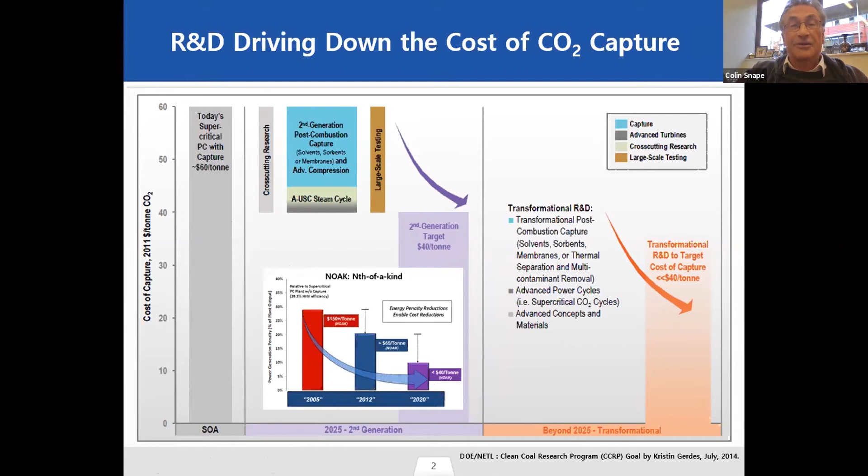The focus is going to be very much on silica polyethyleneimine as a strongly basic system and, as a weaker CO2 adsorbing system, activated carbons. The reason is, at the moment, these are the ones which are the most economically feasible. But really what I'm going to focus on is all the issues that you need to consider on the journey for scale up in terms of stability, and moisture co-adsorption, which I'll bang on about quite a bit as an under-investigated factor.

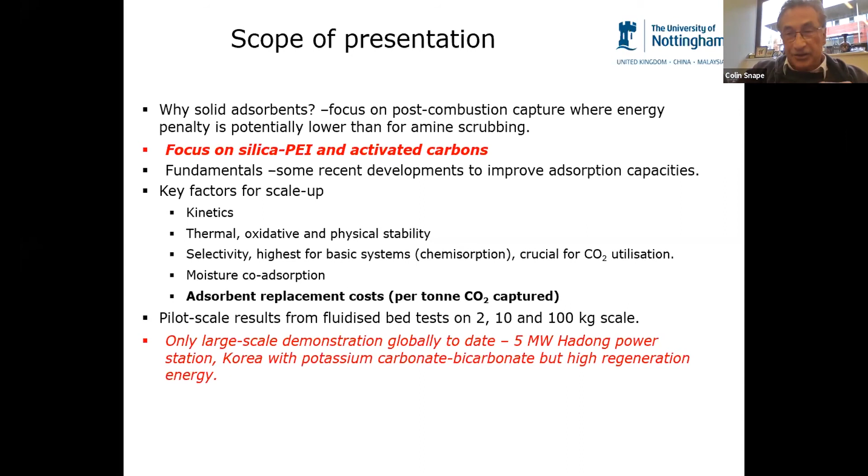And I think as well with amines, what is critical here is the cost of replacing your solid adsorbent per ton of CO2 captured. So I'm going to take you through the journey we've been on, scaling up from 2, 10 to 100 kilogram scale. And as already mentioned, a lot of this has been done in conjunction with the Korea Institute of Energy Research, who built and designed the plant at Hadong Power Station.

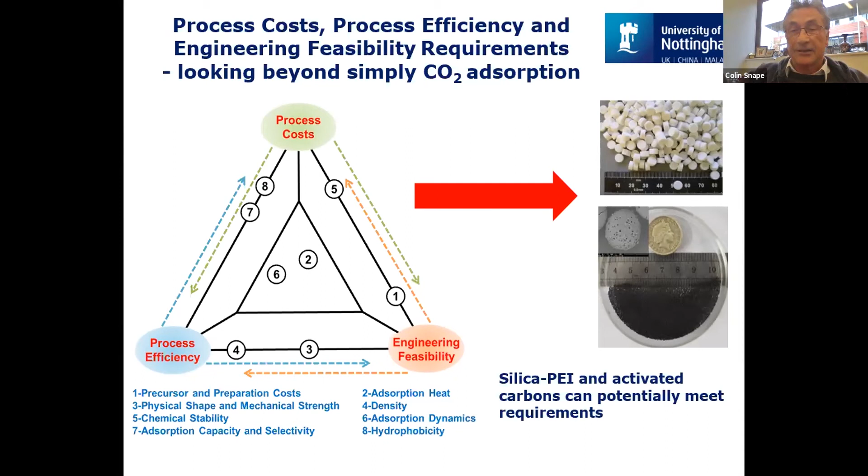So clearly, on the journey from getting published in the highest impact journal possible for the new material you've just discovered, which displays a high adsorption capacity for CO2, I've just listed the obvious factors that might derail you on the journey in terms of scale up as you move to pilot and demonstration plant, particularly physical properties, stability, moisture co-adsorption. And as I said, I'm going to focus on the work we've done on silica-PEI and activated carbons, really to take you through the journey so you can see how some of these factors play out.

But before I do that, what is very important in everything I'm going to say is the regeneration energy. And in the interest of time, I'll just present this in a qualitative sense, that the three principal terms you've got are latent heat of CO2 adsorption, you obviously need to overcome for desorption. There's a sensible heat for heating everything up to your regeneration temperature. And the thing that nobody bothers to investigate, which I'll show is crucially important, is latent heat for steam, for any moisture that's co-adsorbed. So clearly, we want things with low sensible heat, and this is where adsorbents score heavily over amine solutions.

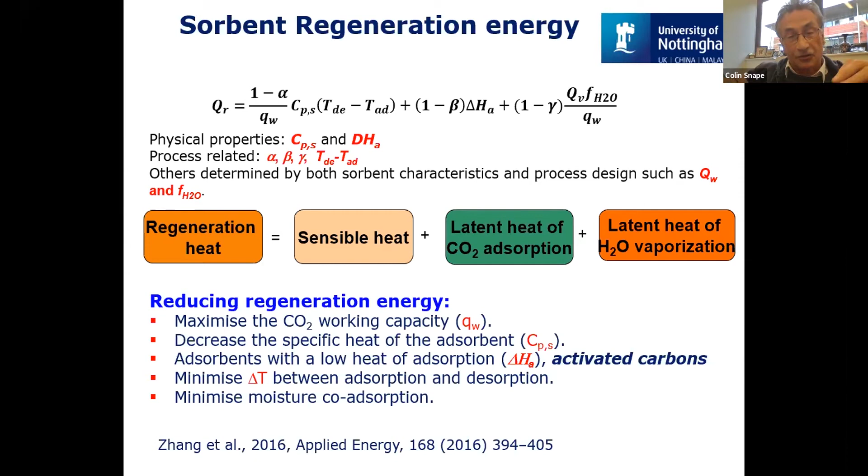Ideally, we want to minimize the heat of adsorption, so the activated carbons have much lower enthalpy of adsorption than silica-PEI, and clearly we want to minimize temperature difference between adsorption, desorption, and, as I've said, moisture co-adsorption.

So we've looked into this in some detail, and we published a comparison with what is taken to be an advanced MEA system, where you are getting down to round about 3 gigajoules per ton of CO2. Taking a very, very conservative approach, we estimated that you should get down to the order of 2.5 gigajoules per ton with silica-PEI. Key parameters in all of this are the working capacity of the adsorbent, and this is based on a very conservative working capacity of 5 weight%. You saw on the previous slide that the equilibrium capacity is around about 10%.

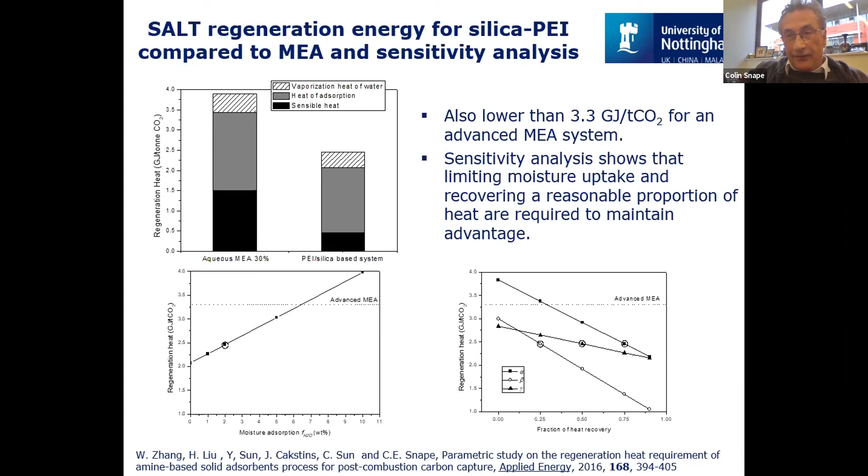And the one thing that really kills you is moisture co-adsorption. It turns out on silica polyethyleneimine, we only adsorb 1 or 2% moisture, but each percent moisture is costing you 0.25 gigajoules per ton. How you can make use of the surplus energy is important, but again, just to gloss over all of this, we've assumed very, very conservative parameters for this.

So we did a similar paper extending this to what effect it would have on an actual power plant, and again, this is compared with an advanced MEA, two cases for supercritical pulverized coal and natural gas combined cycle, and you can see how this works out in terms of efficiency points. And again, just to re-emphasize, we're using a very conservative figure of 5%. If we can get anything over 5%, the picture improves markedly.

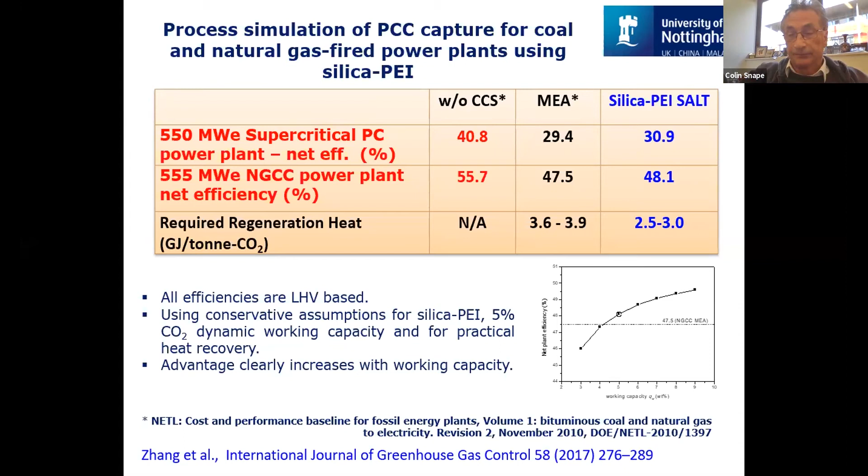So can we do anything better than we did 11 years ago? The answer is yes. We can make silicas with much better properties, and basically because polyethylene imine is a polymer, what you want is a silica with plenty of large mesoporous volume, and we can make silicas by this route. I'm not going to go through it, but you can see there's many steps involved, and what we're starting off with, rather than just dissolving silica in sodium hydroxide, is an organic precursor. We have many organic reagents in the preparation.

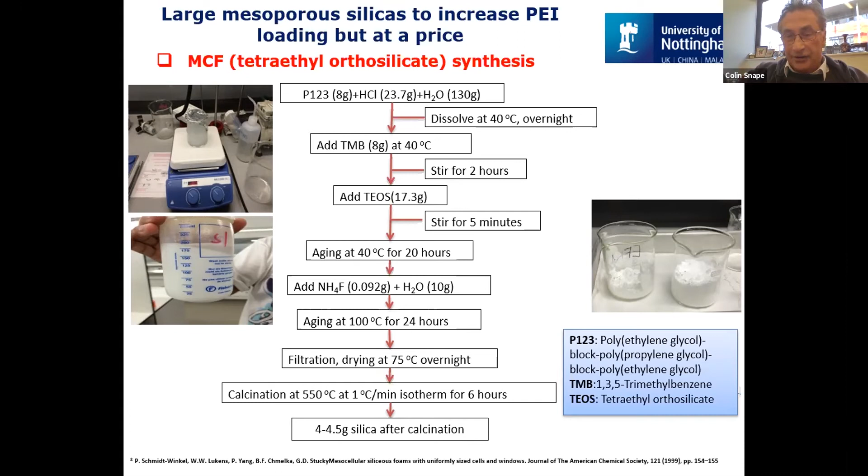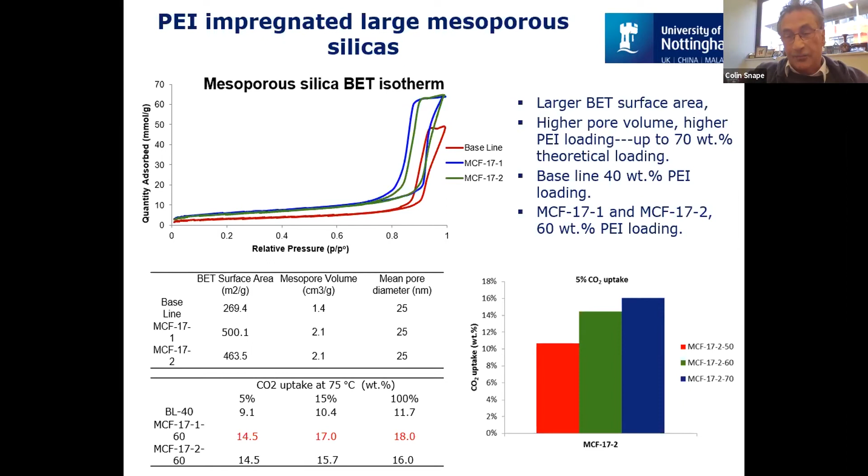So to cut the long story short, this will increase the cost of your silica by a factor of 10 or more. So is this worth doing? The bottom line is the increased pore volume we're obtaining. We can typically increase pore volume by 50%, and this has a knock-on effect. We can absorb more polyethylene imine, and this gives us correspondingly higher uptake. So yeah, we can do better, but it does come at a price.

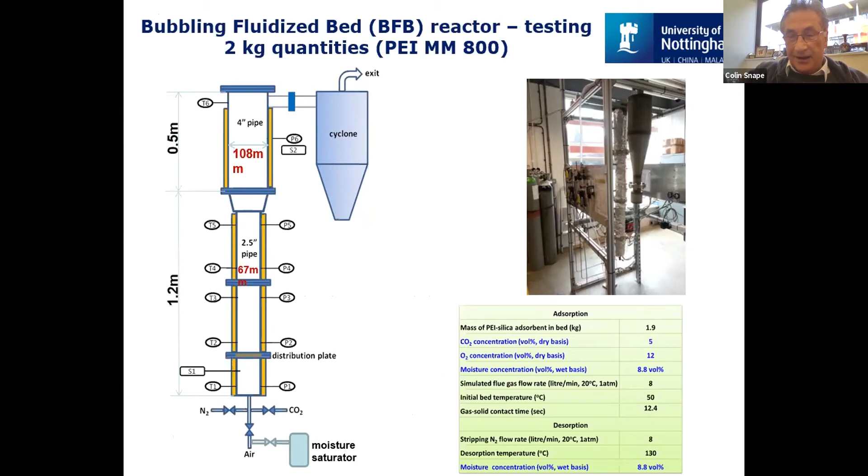So to move briefly onto testing, we started working on a 2 kilogram scale, a rather simple fluidized bed here, which was just used in successive adsorption, desorption cycles. And just to point something out, for fluidized beds, it's very difficult getting the right particle dimensions to give you a reasonably small minimum fluidization velocity, so you can achieve a reasonable residence time, and getting the right particle size range to do this.

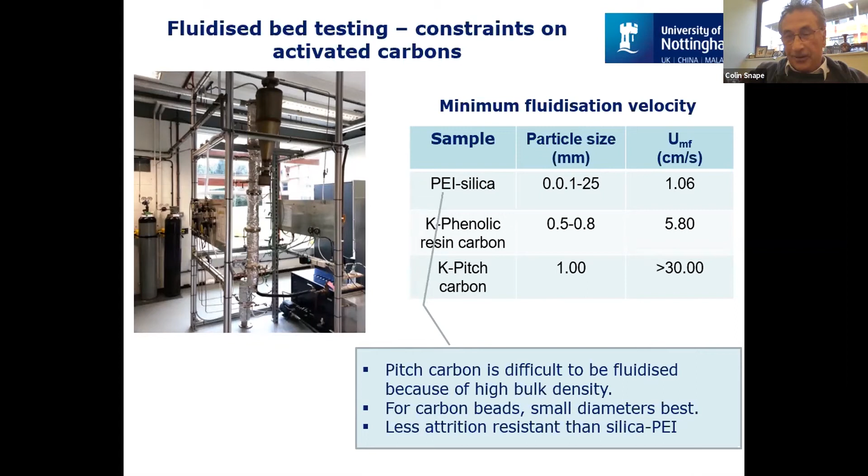And I just throw in a couple of carbon materials. We have a problem with carbons, they're very weak, and you do have a trade-off. You have to make fairly large particles to get the strength, but to do that, you've got high fluidization velocities, which minimizes your contact time. So once you start considering fluidized bed systems for carbons, you do run up against some serious practical issues.

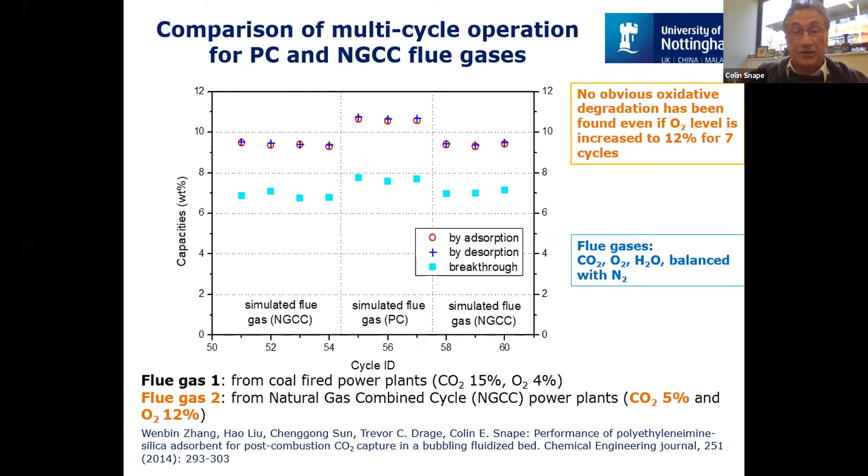So silica-PEI, and this is basically our 2009 preparation here. Life worked out very well, it went through over 60 cycles, so this corresponds to 2-3 weeks continuous operation. Operating capacity was maintained, and we learned very quickly, all you have to do is keep some moisture in the system. Moisture prevents polyethyleneimine oxidizing during adsorption, and during desorption, if you carry it out dry, CO2 and amine groups react to give you urea, and we found out early on you can avoid this reaction by having moisture present.

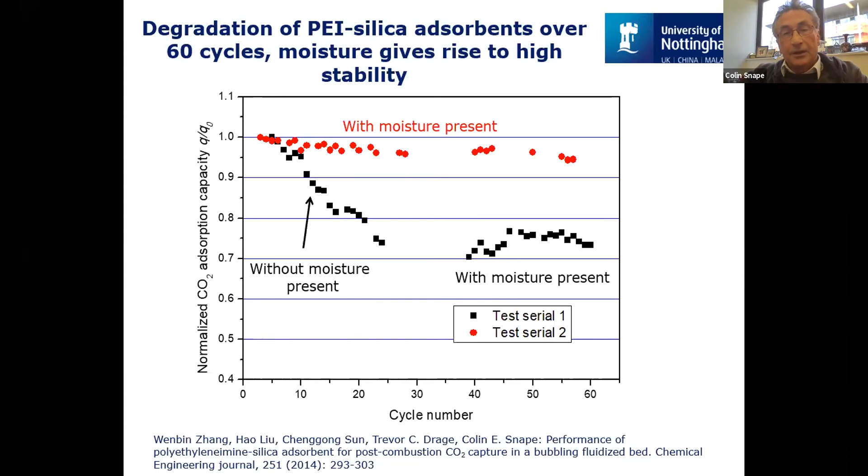If you don't have moisture present, you quickly kill your adsorbent in terms of oxidation and urea formation, as you can see by the reduction in adsorption capacity in this particular slide. So really, I think due to the success of that initial exercise, KIER came to us and asked us, could you scale up the sorbent? And we said yes, taking a rather deep breath at the time.

And what we thought we'd better do is look at particularly the PEI composition, and you do have many variables. I'm just highlighting here molecular mass, because PEI comes in a very convenient form. It's normally transported as a 50% solution in water, and this is great. All you have to do is contact it with your silica, dry the mixture, then you've got your final adsorbent. You look in the literature, the vast majority of people use organic solvents for contacting the PEI with silica. There's no need to. Water is perfectly fine.

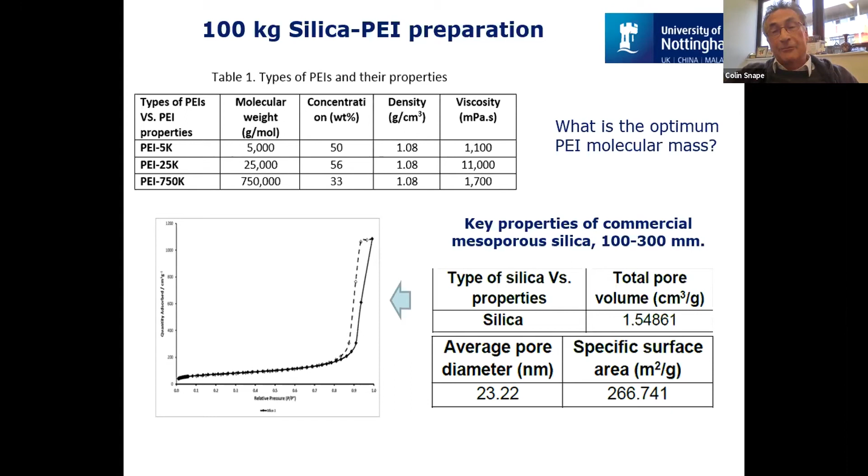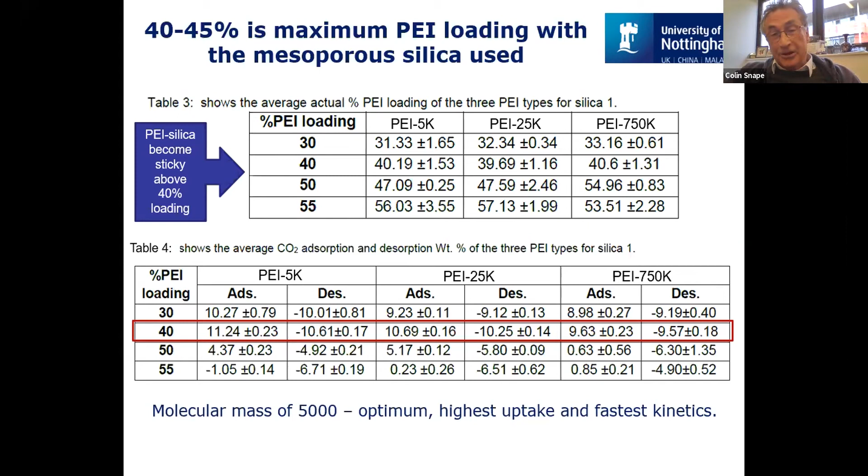And in terms of molecular weight, clearly you've got potentially greater stability, but viscosity of your solution increases, and we rapidly came to the conclusion that a moderate molecular weight represented the best compromise. So we could do this very reproducibly, and we got exactly the same performance as we did on a lab scale way back in 2008, 2009, equilibrium capacities a bit over 10%.

So this is how we literally made 100 kilograms. Here we are mixing the silica-PEI together. We didn't dry it ourselves. We went off to a double cone vacuum dryer to do that before it was shipped to Korea. First of all, just to prove it was extremely reproducible, these were separate batches of the silica-PEI, and you can see performance is constant right across the different batches prepared.

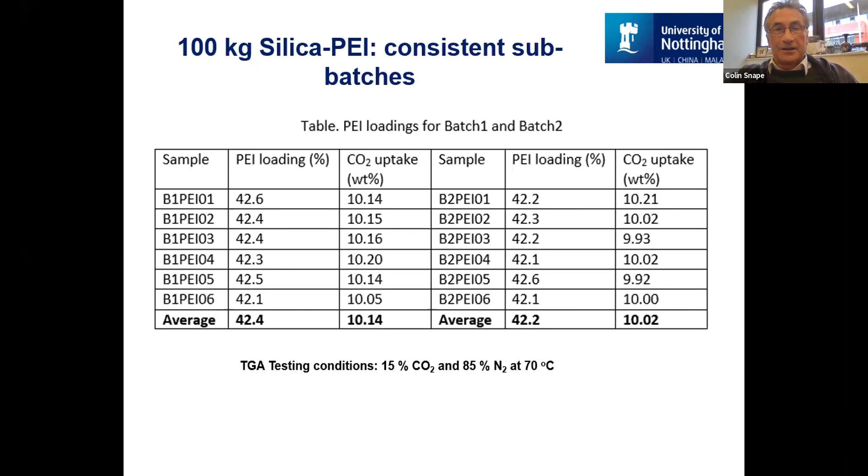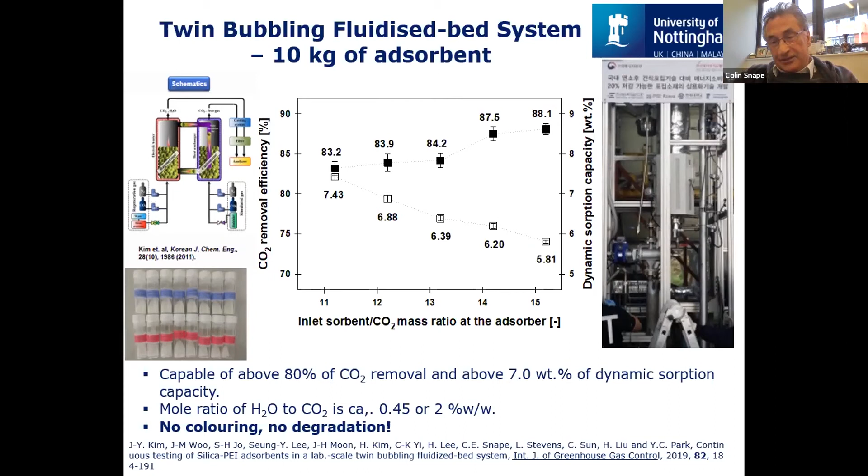So the compromise situation is getting high dynamic adsorption capacity. So you can see around about 7.5%, way above the 5% target we set ourselves, and CO2 removal efficiencies around about 90%. So this tells us, in reality, we can potentially do a lot better than what we said we would do in the modeling studies we published in 2016 and 17. So that's really the picture for silica-PEI.

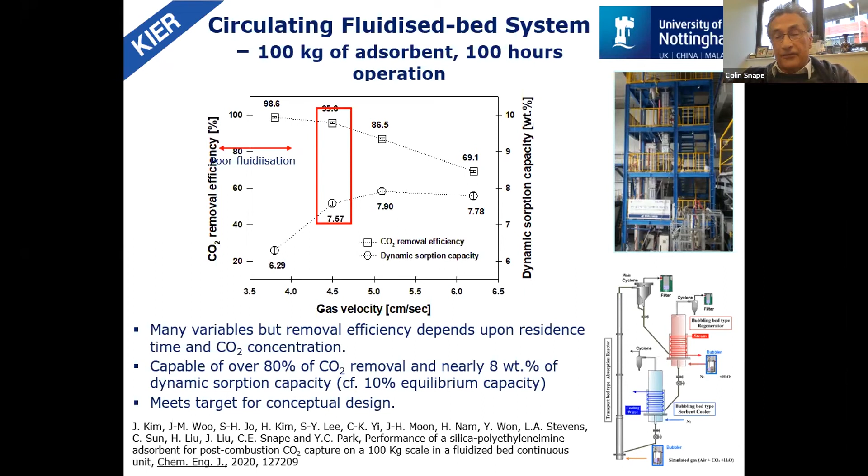Sorry, just one thing. To reiterate, moisture wasn't present at every stage in the rig. So when we did analyze the adsorbents after 100 hours operation, we did see some loss of activity, but this is fine. We know the reason why it happened, so we can make sure it doesn't happen again in the future.

So let me briefly switch to carbons, and we got very interested in carbon beads because they were strong. They could be made from resin precursors quite easily. And really, from what we published in 2009, it was evident to get the benefit of high CO2 adsorption capacities, you have to activate with potassium hydroxide. So if you look at the graph on the top right-hand corner, you can see roughly the CO2 adsorption capacity has doubled because we've activated the carbon. This is under, again, 15% CO2 to simulate pulverized fuel combustion of coal.

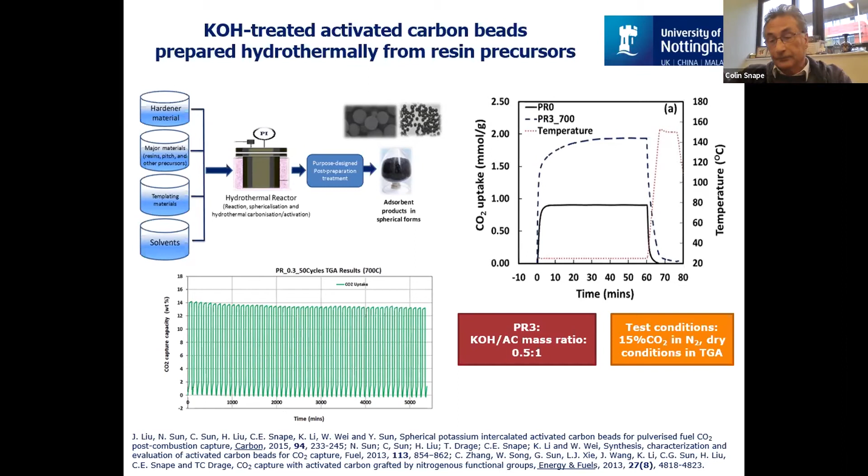So this was all well and good, and what is happening is the potassium gets intercalated in the carbon. The CO2 is bound slightly more strongly, but enthalpies of adsorption are only increasing roughly from 25 to 35 to 40 kilojoules per mole, and this compares with around about 90 kilojoules per mole you've got with strong basic systems such as polyethyleneimine.

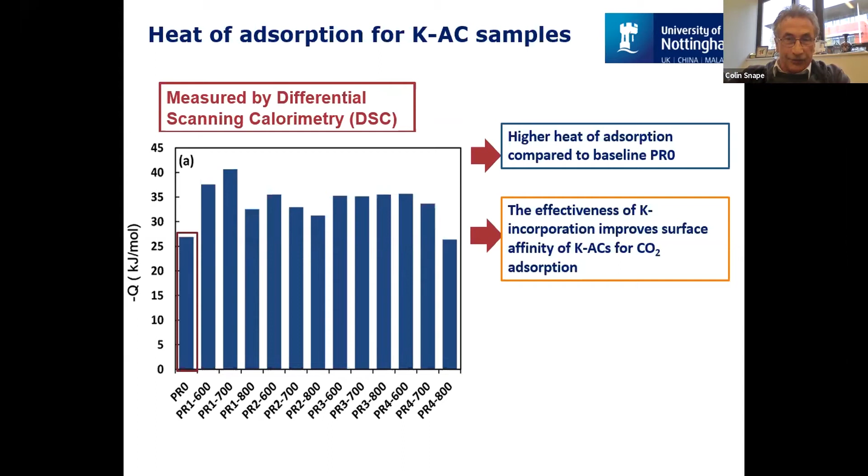So anybody who's followed the literature recently will realize there's a whole plethora of papers on taking various waste materials, putting them through some form of KOH activation, and getting very high CO2 adsorption capacities. We are no exception. We've joined in the fun, and I just want to take you through two precursors.

Chenggong Sun, I think, talked about these in much greater detail, but just taking rice husks, KOH treatment, we could generate materials that have very small micropores with potassium intercalated, and we were obtaining high CO2 uptakes over 2 millimoles per gram at 20-25 degrees C.

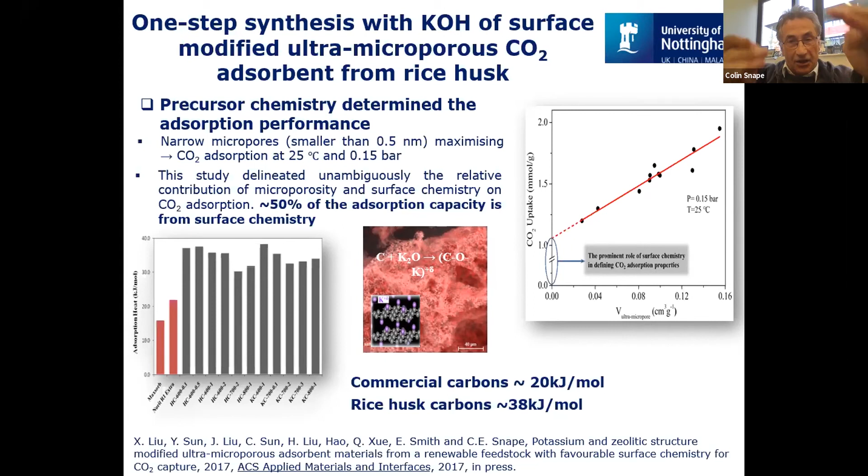So the key is, as well as intercalating potassium, generating small micropores, and this theme has really continued in work that's just been published this year on using essentially a form of polyurethane, polyisocyanurate resin foam, and all you have to do is oxidize your foam, compress it to increase the density, then KOH activate.

And with this material, it's a combination of small ultra-micropores, around about 0.4 nanometer, potassium intercalated, with nitrogen functionalities playing a bit of a role. But the headline figure is we can get up to over 2 millimoles per gram at 40 degrees. So that's obviously much higher than the 25 degrees which featured on the previous slides.

So all this sounds wonderful, and clearly with the proviso for activated carbons, you really have to think in terms of a moving bed rather than the fluidised-bed system for scale-up. But before we move on to scale-up, what can really knock you for six for activated carbons is moisture adsorption. And this just compares the rate of moisture uptake at different relative humidities at ambient temperature.

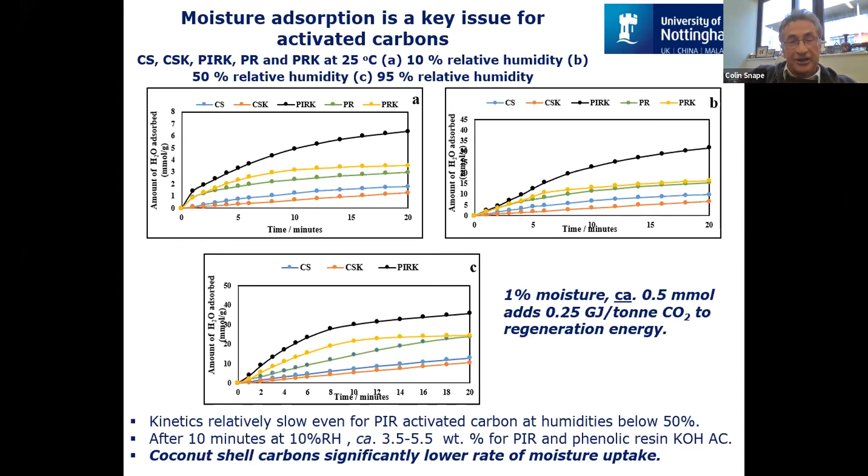But clearly, this is one thing that nobody ever publishes in the literature and can kill you stone dead in terms of regeneration energy for carbons. So my other cautionary note is on scale up, because clearly buoyed by the success of what we did at the lab scale, we thought let's try scaling up. And the one thing I need to say is today commercially throughout the world, nobody produces KOH activated carbons at large scale, and clearly the reason is obvious: KOH at 800 degrees is highly corrosive.

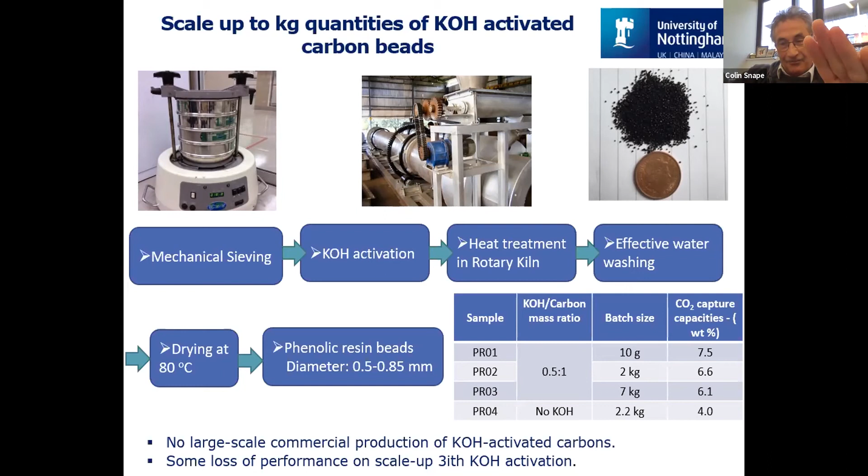So we did persuade our colleagues at CPL to take some carbon beads, put these through the rotary kiln, and as you can see, we are losing some of the initial performance as we go to larger scales. It gets very difficult to reproduce what you did in a lab at a small scale, and the story is very similar for the polyisocyanurate resin foam, where we do low temperature oxidation, and trying to do a low temperature oxidation on a solid gives you huge problems trying to control the temperature.

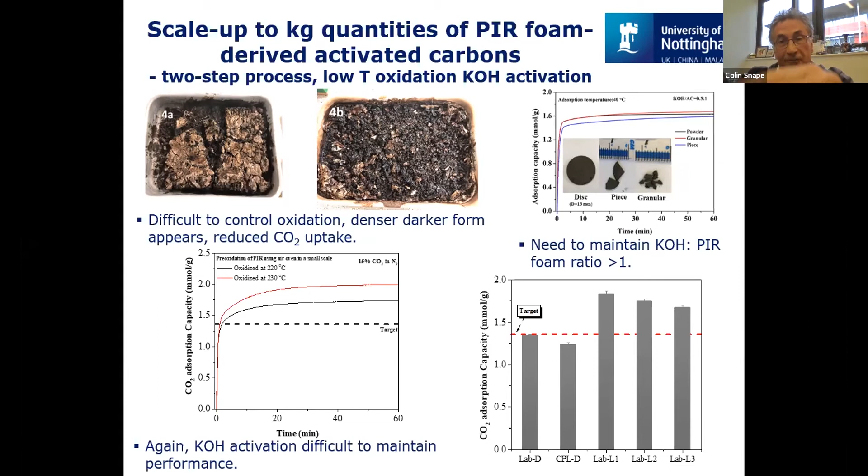And if you look at these pictures, you can see the material we end up with is extremely heterogeneous. It's the light material we want, but it's very difficult to stop the exothermic oxidation getting out of control and giving you some of the darker material. And you can see that as you go to higher and higher temperature, you lose some material. And when we compare lab preparations with what we actually prepared on a larger scale at CPL, you can start to see we are losing activity, which can be ascribed in part to this over-oxidation and also in part to some of the activity that's lost with KOH.

So I'm nearly at the end now. John, how many minutes is that? Oh, sorry, Chairman is offline, but according to my watch, a bit over 25 minutes. So we've got time, Colin.

So clearly, in terms of putting this into context, this slide is very important. And what I'd really welcome in the discussion is, because whatever technology you've got, you want to try and minimize your material replacement cost. And I put the numbers for other capture technologies in brackets because these are what I've been quoted rather than what I've read in the literature. But I've heard from more than one source that for MEA scrubbing, you're looking at anything up to £15. High temperature calcium looping, because it's a relatively cheap material you're using, calcium oxide, calcium carbonate, the cost is much lower.

So what I thought I would do is set myself a limit of £10 per tonne of CO2 captured. And I thought I'd again take very conservative operating parameters. Adsorbent going around, taking 40 minutes to go around the loop, that's the adsorption, desorption cycle. And what we think is a very conservative working capacity of 5 weight percent CO2. So if you do the arithmetic on that, you can work out that in a year, 1 tonne of adsorbent will capture 1,000 tonnes of CO2. So we're dealing in nice round figures.

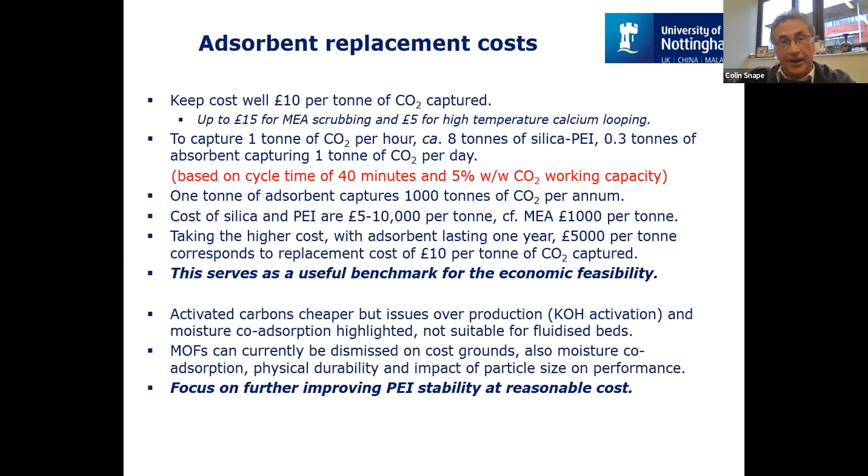But let me conclude. Because of my years, I think most of you know, I am partially retired, and one or two people have indicated that I have become somewhat more grumpy over the last 2 to 3 years. But I think if you go back to the original slide of 2003, there have been considerable scale-up challenges, which I think have slowed down the pace of development.

I've not talked about air capture today, but in terms of material challenges, silica PEI, and we've published on this, is ideal for low temperature air capture. As I've indicated, there is scope for cost reduction, and really the simple economic analysis is if your material costs £10,000 per tonne, then basically it has to last roughly for a year.

Activated carbons do have limitations, potentially with respect to moisture co-adsorption, particle size, and clearly weaker CO2 adsorption means you're only looking at cement and coal. There's no way you can use activated carbons on gas. And I've got to hold my hand up and say we've been as guilty as everybody else in putting out loads of papers on new adsorbent materials and just focusing on CO2 uptake.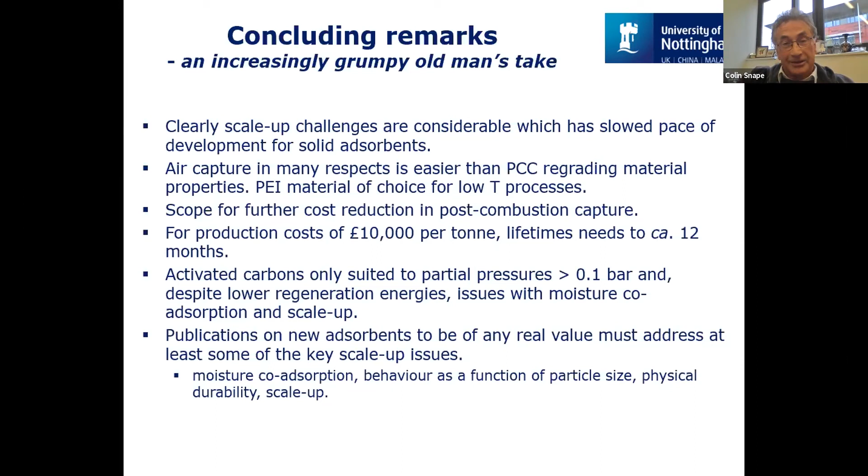But the grumpy old man in me now says papers should not be published unless they address one or more of the following factors in some detail. Those factors being moisture co-adsorption, particle size, physical and chemical durability, and yes, how easy it is to scale up the material. So I'll rest my case there.